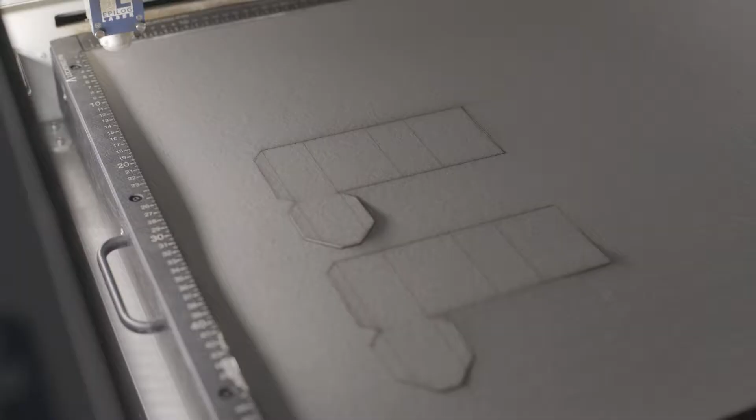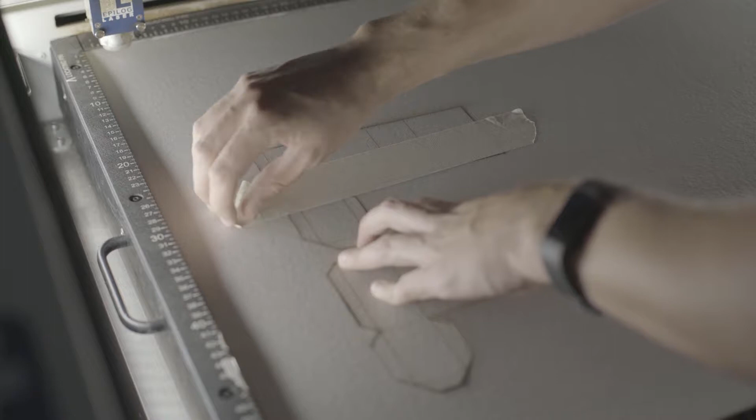As many of you will be aware, the general process of keeping pieces together after they've been cut is to tape them down to the sheet with masking tape. However, having to then remove the tape can sometimes damage the material or leave undesirable marks on the sheet's surface, depending on the material. Generally, the materials affected are card materials such as boxboard, mountboard, and optics card.

In this video, we'll go through a simple technique in Rhino to avoid cut pieces needing to be taped to the sheet by creating small etch sections within your external cut profiles so you keep the original finish of your material. This technique can also be used for small pieces you require to be cut that may likely be lost through the laser cutter's bed.

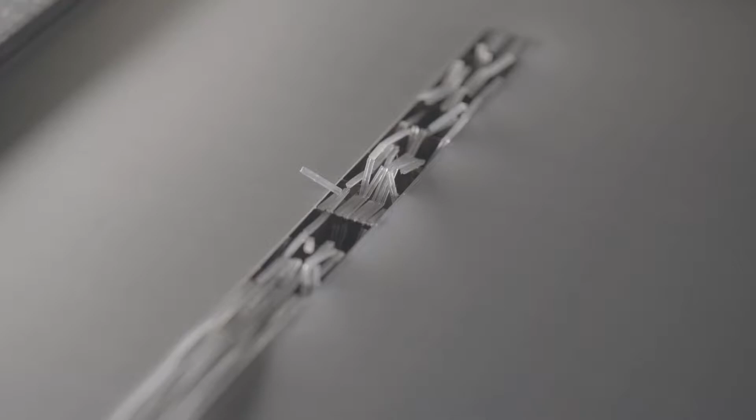In Rhino, once you've nested your line work in the template file and everything is ready for submission, identify where all your external cut profiles are. Having done this, use the explode command to explode and separate any joined cut lines and polylines.

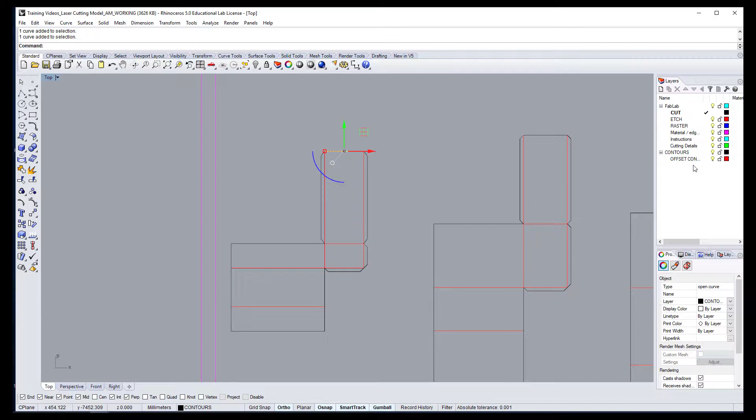It is then simply a matter of selecting one or two individual lines from the external cut profile and changing them to etch lines, again by right-clicking on the etch layer and selecting the change object layer. I've selected two sections at opposite ends of the cut profile to evenly hold the piece in place after it has been cut.

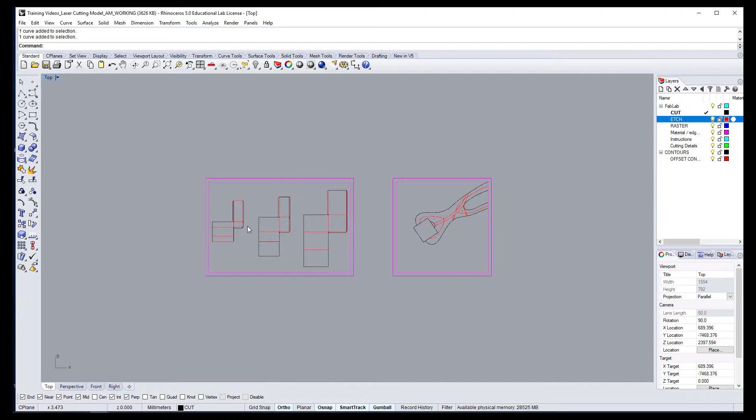Straight lines are preferable, as these will be easier to cut with a knife and ruler once you've received your laser cut job. However, if you have more complex geometry, you may need to choose a section of your external cut profile and split it with temporary drawn lines.

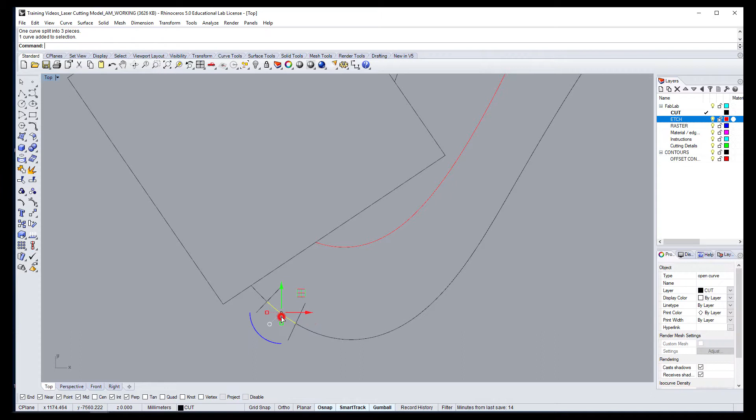Draw two straight lines that intersect your cut profile, then type the command split. Select the cut profile you wish to split and hit enter. Then select the two temporary intersecting lines and hit enter again. This will give you your section of the cut profile to convert to an etch line in order to hold the piece in place when being cut. Finally, delete the temporary intersecting lines.

Please do note that this technique is really only suitable for thinner materials such as the optics card, boxboard, mountboard and polypropylene that can be easily cut with a blade knife. Thicker materials such as MDF, plywood and perspex will be far more difficult to cut.